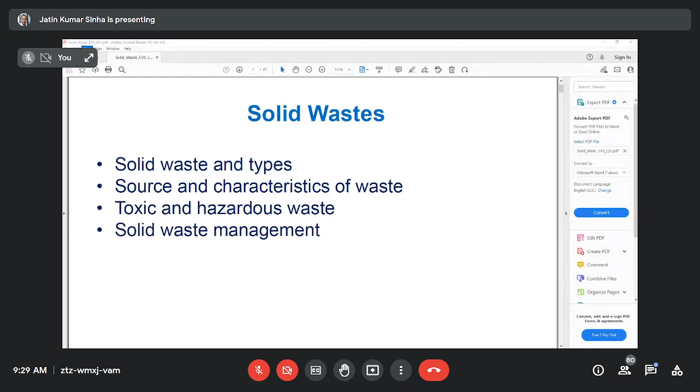Okay, so this is going to be the last unit: solid waste and its management. So first, what is solid waste? Then its types, then sources and characteristics of wastes, then we'll discuss toxic and hazardous waste, and finally solid waste management. So this is the final part of environmental science.

So if we are producing solid waste, what are the management systems we have, in developed countries as well as countries like us? So first, to define what waste is: waste is basically the rubbish, trash, refuse items, garbage, junk, litter. These are coming under solid waste, or in general, waste.

Now, for a not exactly scientific but universal definition, that comes from the Basel Convention: substances or objects which are disposed of, or are intended to be disposed of, or are required to be disposed of by the provision of law. So anything you want to dispose of, intend to dispose of, or are required to dispose of by law, is known as waste. Disposal means any operation which may lead to resource recovery, recycling, reclamation, direct reuse, or alternative uses. These are the official definitions of waste according to the Basel Convention.

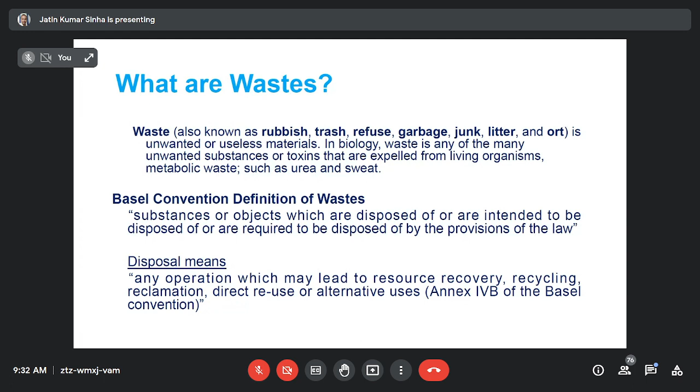Is it important to define waste? It is definitely important. Why? Because it leads to the formulation of waste management systems, also from a health point of view. The definition of waste is needed for management, policy development, and environmental and human health purposes.

When defining waste, you must ask what kind of waste it is and what its sources are. According to that, we categorize different types of waste.

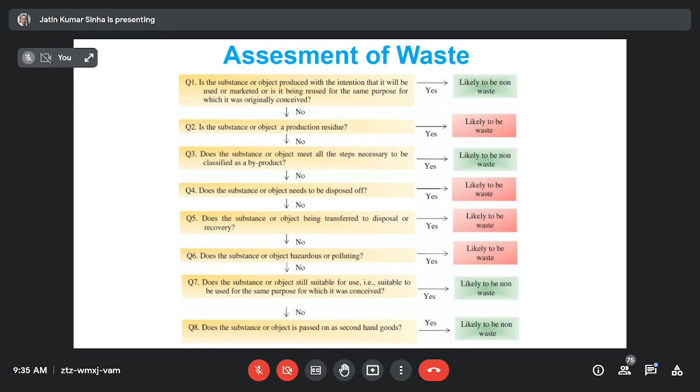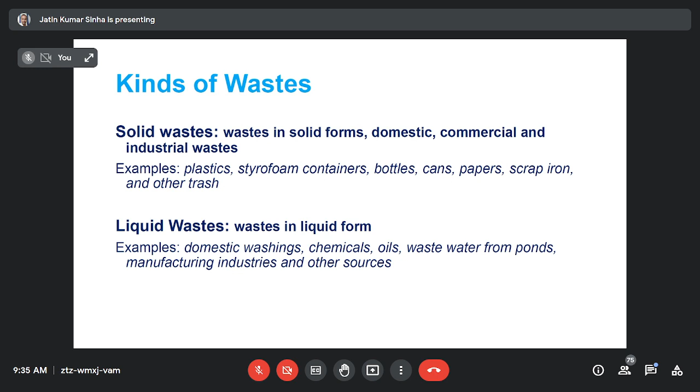Next is kinds of waste. Solid waste is waste in solid form: domestic, commercial, and industrial waste. Examples are plastics, styrofoam, containers, bottles, cans, papers - anything solid coming from your household or any industry. Then liquid waste, waste in liquid form: examples are domestic washings, chemicals, oils, wastewater from ponds, manufacturing industries, and other sources. This is waste classification in terms of physical appearance.

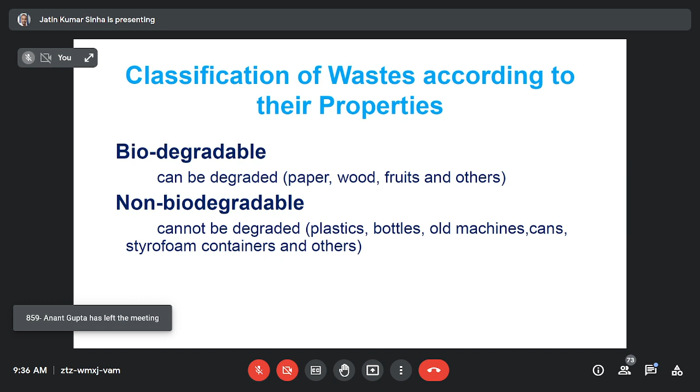Now, classification of waste according to their properties: whether they are biodegradable or non-biodegradable. Biodegradable waste includes paper, wood, fruits, and others. Non-biodegradable includes plastics, bottles, old machines, cans, all e-waste, styrofoam containers, and anything not biodegradable falls in this category. Organic foods, paper, wood, and fruits come as biodegradable. This is an important question because based on that, segregation happens. Once segregation happens, it comes for recycling, reuse, or disposal.

We can also classify waste according to its effects on human health and the environment, based on toxicity - hazardous waste or non-hazardous waste. Hazardous waste consists of substances unsafe to use commercially, industrially, agriculturally, or economically, having properties like ignitability, corrosivity, reactivity, and toxicity. If waste falls under this category, it is hazardous waste. Non-hazardous waste is safe to use commercially, industrially, agriculturally, or economically, and does not have any of those properties. These substances usually create disposal problems. Although we define that, the question remains: how to dispose of them?

Now, classification according to their origin and type. There are different types: municipal solid waste, biomedical waste, industrial waste, agriculture waste, fishery waste, radioactive waste, and e-waste. All these things are related to our day-to-day life, directly or indirectly.

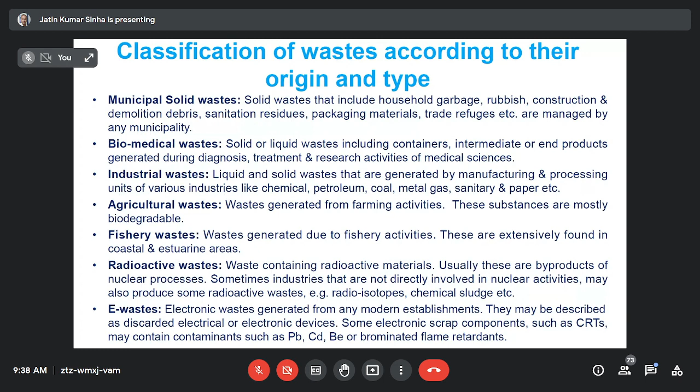Now, what is the general disposal system in developed countries versus developing or underdeveloped countries? In developed countries, after waste generation, it goes for segregation at source, disposal in respective bins, then collection and transportation, then scientific treatment, and finally disposal.

Whereas in developing nations, due to many constraints, waste generation happens, then unsegregated waste results—this is one of the biggest problems of our country and all developing nations. It's disposed at community bins. Collection and transportation also have problems; although these things happen, it's not on a regular basis and the frequency is not that great.

And finally it goes for disposal. What kind of disposal do we do? Basically it goes for landfill most of the time—all the waste goes for landfilling. In that waste you have all the toxic and hazardous materials, so they end up in the environment, polluting it. This is what is happening in our country and in developing nations.

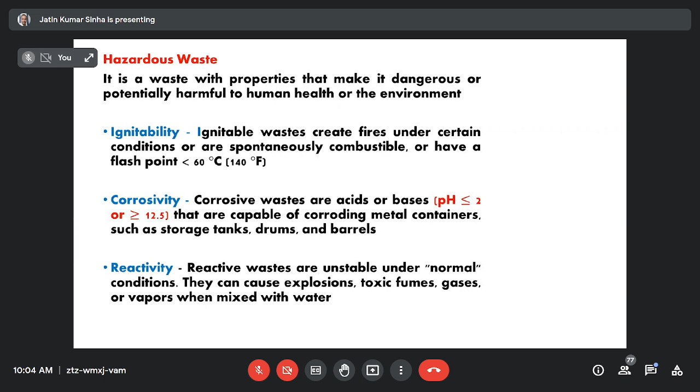Heavy metals are very unlikely, but cancer patients, when they go for chemotherapy, the drug has some heavy metals which they take to kill the cancer cells. So particularly for patients under medication with drugs having heavy metals, they have to be careful.

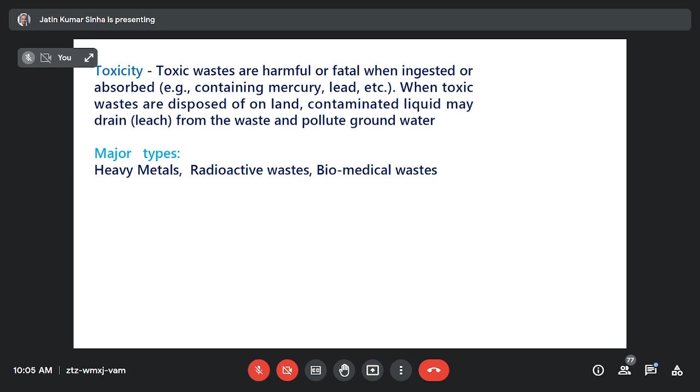But this type of toxic waste is very much limited at home, besides a few toxic metals like mercury and lead. But again, lead we are not using that much nowadays.

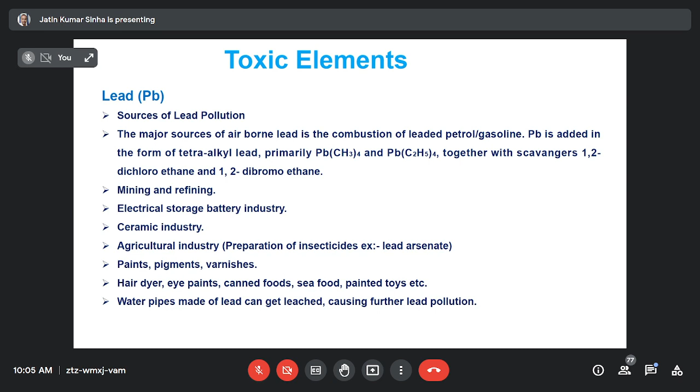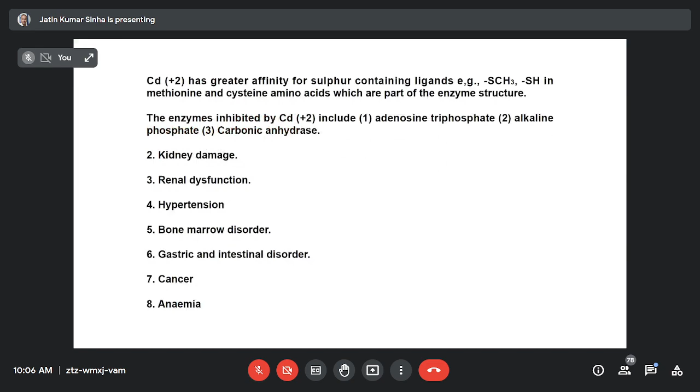About the toxic elements, here there are a few slides describing the toxicity of different metals. So there are a few examples—I'll just go through it directly. You have lead, then cadmium, then arsenic, then mercury. These are the common toxic materials that may be used at the household level.

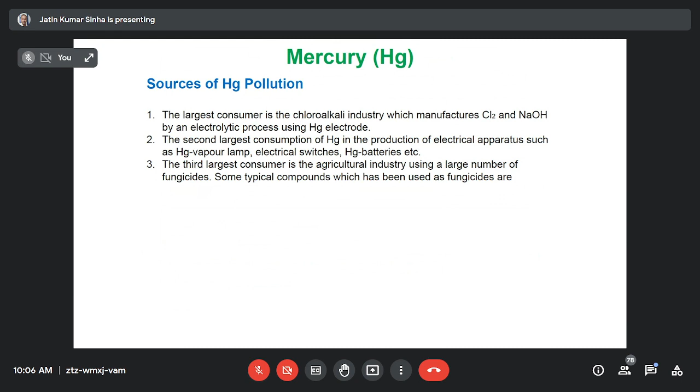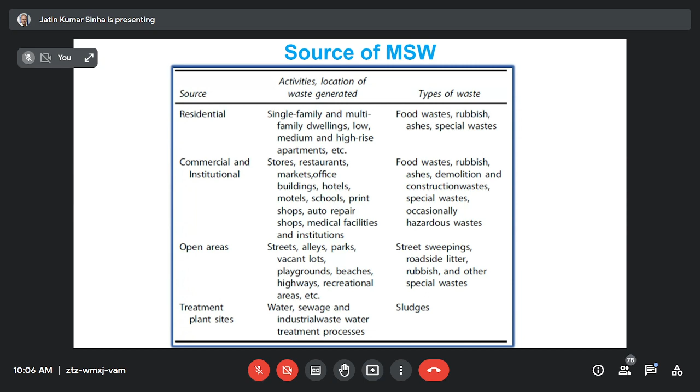I'll just go through it quickly. Then there are the sources for municipal solid waste, with different categorizations telling what type of solid waste is coming. For example, food waste, rubbish, ashes, special waste. Commercial and institutional sources also have food waste, rubbish, ashes, demolition, and construction waste. So some categorization is there—I'll just go through it quickly.

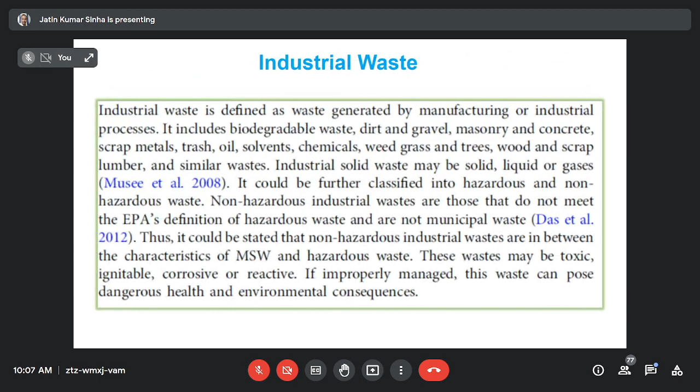Then comes industrial waste, and also hazardous waste from industry. There are also statistics and research data on what types of metals and heavy metals are in different types of waste. For example, in paper cardboard, you have arsenic, cadmium, chromium, antimony, mercury, manganese, lead. So there are different classes of data and statistics on toxic elements in different types of waste.

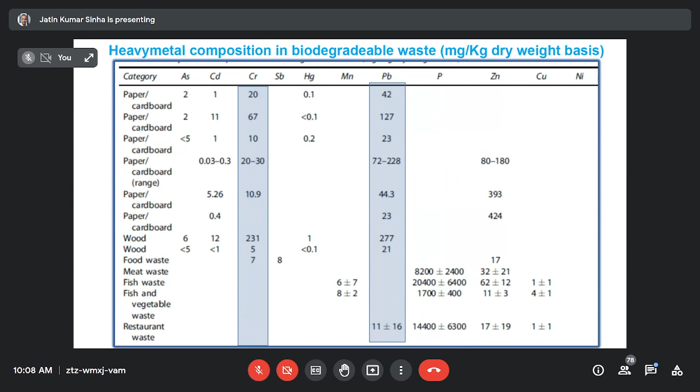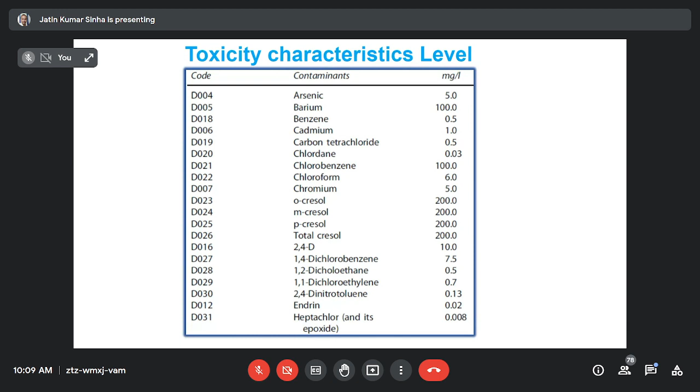So if you see a bottle having some chemicals but don't know what type of chemicals are there, if the code is written, then you can know what type of contaminant or metal is inside that bottle. This is very common for the food industry and also the chemical industry—they use different types of codes to categorize different types of contaminants.

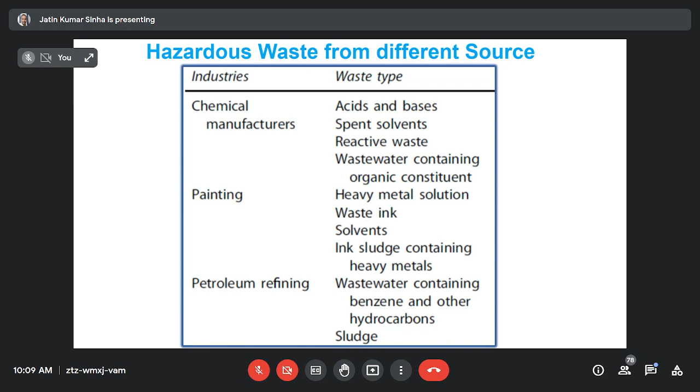Then there are hazardous wastes from different sources. Industry, and what type of hazardous waste may come from it. For example, from chemical manufacturers, mainly the wastes are acids and bases, spent solvents, reactive waste, and wastewater containing organic constituents. If it's a painting industry, heavy metal solutions, waste ink, solvents - these type of hazardous waste come out. If it's petroleum refining, wastewater containing benzene and other hydrocarbons, and sludges.

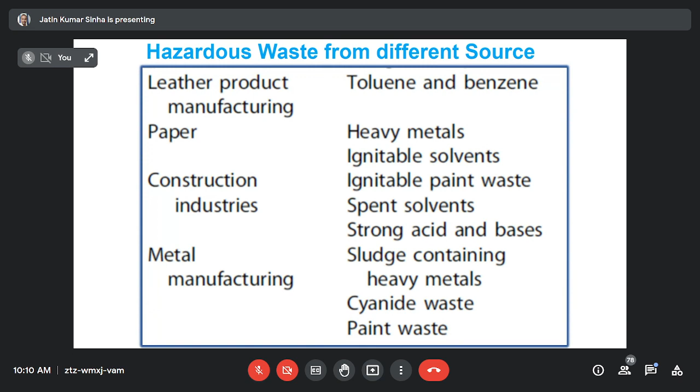Then we have a listing of hazardous waste, depending on different types of categories.